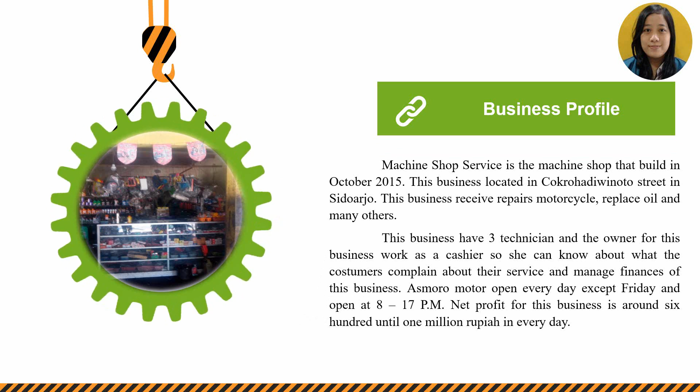This machine shop service opens every day except Friday, from 8 a.m. until 5 p.m. From this business, she gets a net profit of around 600 thousand to 1 million rupiah every day.

And now I will explain the service mechanism of this workshop. To get service in this workshop, we just come to the workshop with our motorcycle and explain to the technician the problem with our motorcycle. While waiting, we are not given a ticket or anything until the technician comes and asks us about the problem with our motorcycle. After that, the technician will check our motorcycle with the equipment and ask you to go to the cashier to bring the components that the technician needs to repair your motorcycle.

To prepare, it takes 5 to 8 minutes. After that, we wait until the technician finishes the job repairing our motorcycle. After finishing, the technician gives extra service like pumping tires or cleaning our motorcycle. And after the technician finishes the job, we go to the cashier and pay our bill.

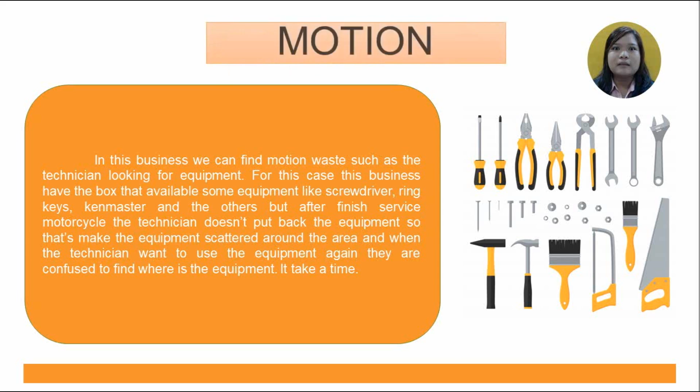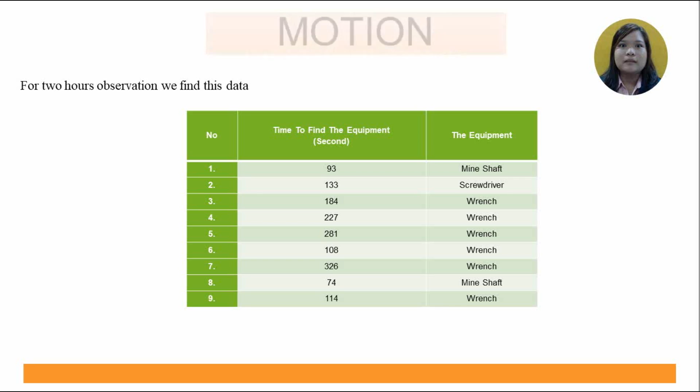From this table, we can know that the technician needs more than one minute to find the equipment, and sometimes when they find the equipment, they need more time because the equipment is still used by another technician, and when we ask about other equipment with the same function, it takes more time to find. Some of the equipment is broken, so the technician waits until the equipment is finished being used.

Waiting is one of the wastes because waiting is a non-value added process. If we can reduce waiting, we can make the work efficient. In this business, the waste that we classify as waiting is when the technician searches for equipment and the equipment is already used by other technicians. Another waiting waste that we found is that not all the technicians have the same skill.

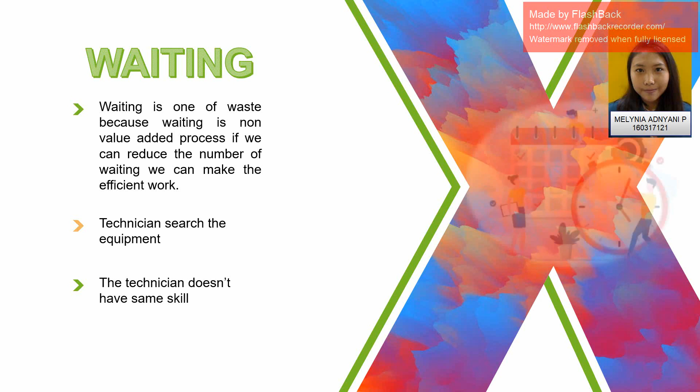So if the service is much like checking the machine inside, it needs a technician with long experience. Another waiting waste that we found is the queue doesn't use tickets. So sometimes the queue doesn't work properly because the technician asks and sees which one is easier to service. It makes the other customers unhappy, and they must add time to wait until they can be served.

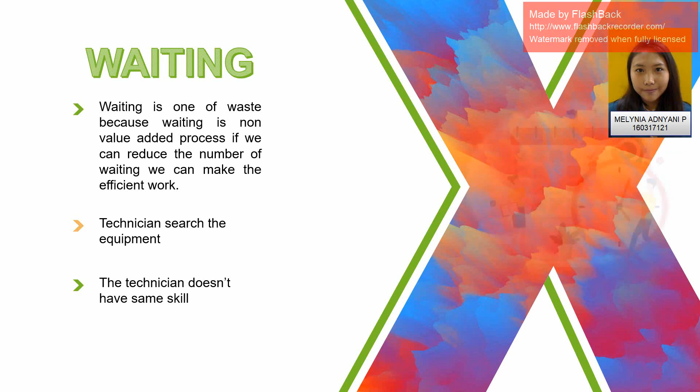Overprocessing is another waste that we found in this business. Overprocessing is a process that isn't needed and doesn't give added value to the product or service. The technician does something extra with the instruction from the owner. When we asked why the owner added the process, she said that she wants to increase customer satisfaction.

But when we asked again, does any customer need that process? She can't answer. Other overprocessing that we found in this business is the technician adds air in the wheel and cleans their motorcycle.

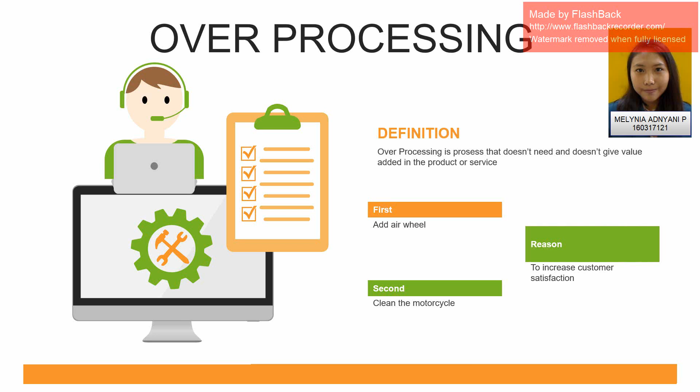5 whys analysis. 5 whys analysis is one of the methods that we learn in the Lean system. The function of this method is to find the root of the problem from the waste that we found in this business. The detailed analysis can be seen on the next page. First is motion. In this business, the motion that we found is when the technician is looking for the equipment. In the 5 whys analysis, we got 4 questions for this topic.

First question is, why is the technician looking for the equipment? And we got the answer that it is because the equipment isn't in a box. Second question is, why isn't the equipment in a box? That is because every time it's finished being used, the equipment is never put back in its place. Third question is, why is the equipment never put back in its place after use? And we got the answer because there is no regulation.

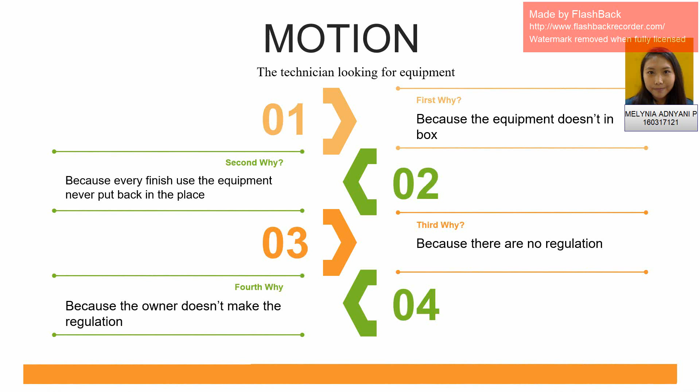And the last question is, why is there no regulation? Then we got the answer that it is because the owner doesn't make the regulations. So the root of this problem is that the owner doesn't make the regulations. If the owner wants to reduce the amount of motion in his business, the owner must have a regulation for the equipment, so the technician can easily find the equipment. Okay, I will continue the presentation.

For the waiting waste, we also asked the 5 whys. The first why is, we asked why the technician searched for the equipment, and we got the answer because the equipment isn't in the box. Then we also asked the second why, why the equipment isn't in the box, and we got the answer because after every use the equipment is never put back in its place.

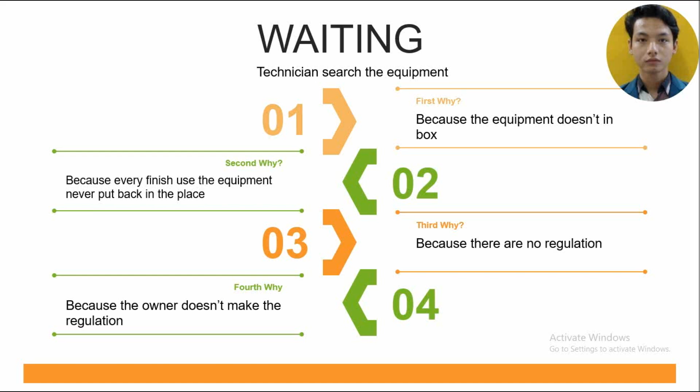And we also asked the third why, why the equipment is never put back in its place after use, and we got the answer because there is no regulation. Then we asked the fourth why, why there is no regulation, and we got the answer because the owner doesn't make the regulation. So the root of the problem for the waiting waste of the technician searching for the equipment is that the owner doesn't make the regulation. And then we continue with the next waiting waste.

That is, the technicians don't have the same skill. We also asked the first why, why the technicians don't have the same skill, and we got the answer because not all the technicians can do the hard service. Then we asked the second why, why not all technicians can do the hard service, and we got the answer because practice or training was never held.

Then we asked why practice or training was never held, and we got the answer because the owner doesn't hold training. And then we asked why the owner doesn't hold the training, and we got the answer because there is no time to hold the training. So the root of the problem for the waiting waste of technicians not having the same skill is that there is no time to hold the training.

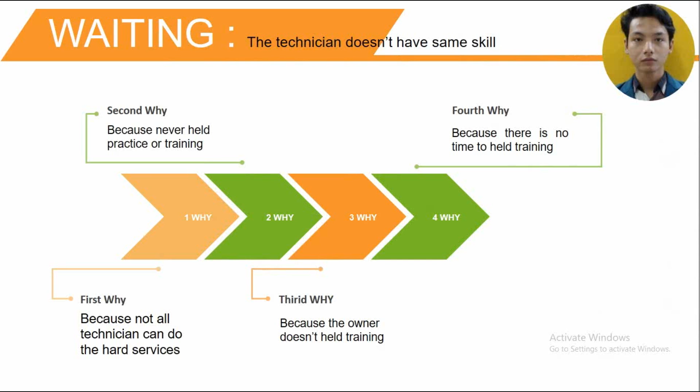And then next from the over processing, there is add air wheel and clean motorcycle. We also ask the first why: why the technician should add air wheel and clean the motorcycle, and then we got the answer: because it's the owner's regulation. And then we also ask why the owner makes this regulation, and then we got the answer: because the owner believes it can increase customer satisfaction.

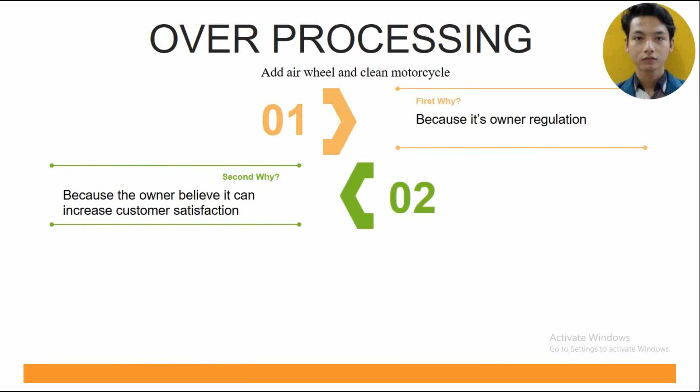So the problem for this waste, over processing, is add air wheel and clean the motorcycle. We know that the owner believes it can increase customer satisfaction. So what should we do to make the improvement? Okay, for improvement, the easy and great improvement step in this business case is using 5S: sort, set in order, shine, standardize, and sustain.

First, sort all of the equipment. Which one still can be used and which one is broken. If there is any broken equipment, the owner should buy a new one. The sort can also sort the equipment by frequency of use. So if the equipment is used very often, the owner can buy the same number as the technicians. So it can reduce the amount of waiting and motion.

After we sort the equipment, we can set in order the equipment. In this case, we suggest it will be better if every technician has their own box with the equipment inside, the equipment with very often frequency of use, such as a wrench with a certain number, so the technician doesn't need to find and look for where the equipment is, and make a board of equipment that is rarely used so the technician and owner know if there is any used equipment or missing. With that step it can automatically reduce the amount of motion and waiting because it's easier to find the equipment.

Okay, the third step is shine. After sort and set in order are finished, the next step is shine. Maybe that will be hard because a machine shop works in a not clean area, but this step can be implemented like after the technician is done servicing a motorcycle, they should clean the unused items like oil bottles, wheels, chains, and others. So cleaning the unused items can make the area more clean.

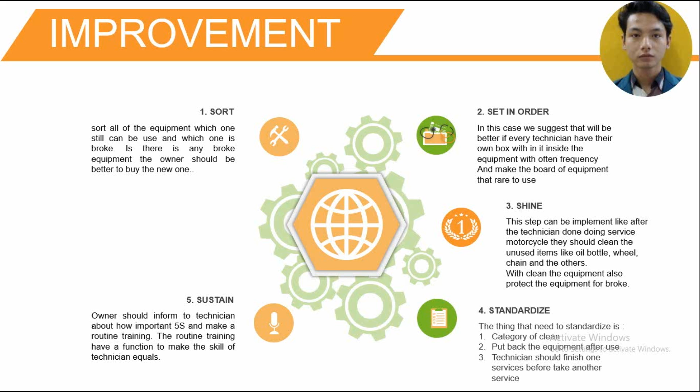And then the last is sustain. The owner should inform the technicians about how important 5S is and make routine training. The routine training has a function to make the skill of the technicians equal. If it's hard to find a day, I think the training can be held on Friday. Maybe if it's so hard every week, they can do it every 2 months or every month. So with that, the technicians will have equal skill.